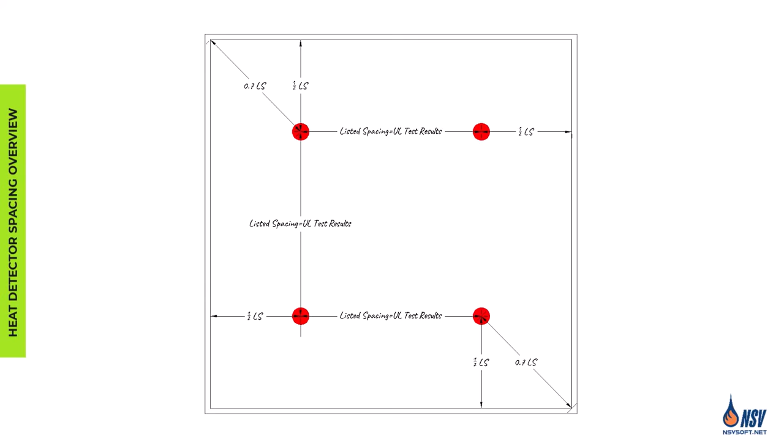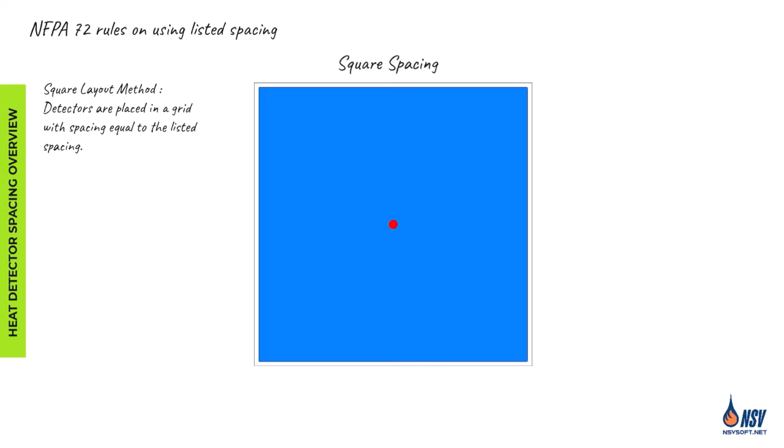There are two methods for applying listed spacing: the square layout and the circular layout. In square layout method, detectors are placed in a square grid pattern. The distance between detectors is equal to the listed spacing. Each detector covers a square area. For example, with 50 feet spacing, 50 feet times 50 feet equals 2,500 square feet.

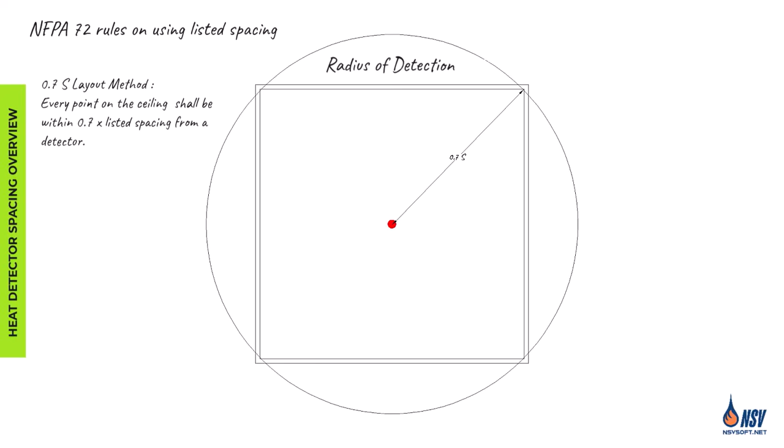In the circular method, every point on the ceiling shall be within 0.7 times listed spacing from a detector. For example, a 50 feet listed spacing detector radius is 0.7 times 50 equals 35 feet.

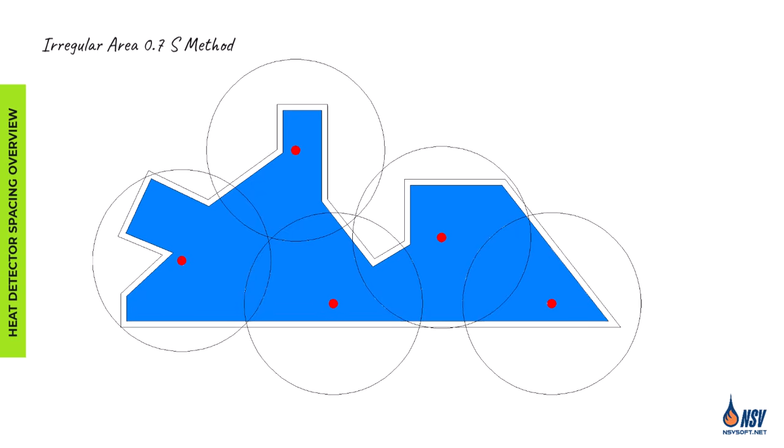Depending on the architecture, square layout suits grid-like spaces and may require more detectors, while circular layout is ideal for irregular areas and corridors, often maximizing coverage with fewer devices. As you can see in this irregular space example, the circular area method reduces the number of detectors. With the circular method, only 5 detectors are needed, while the square method requires 7 detectors to properly cover the area. Heat detectors are typically spaced according to standards established through full-scale fire tests conducted by underwriters' laboratories.

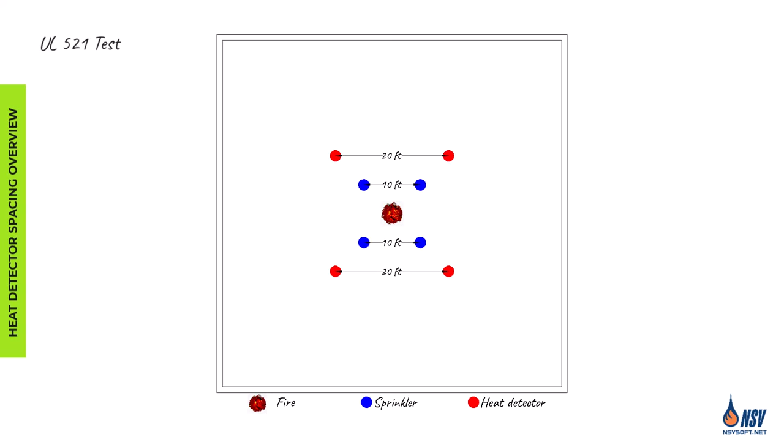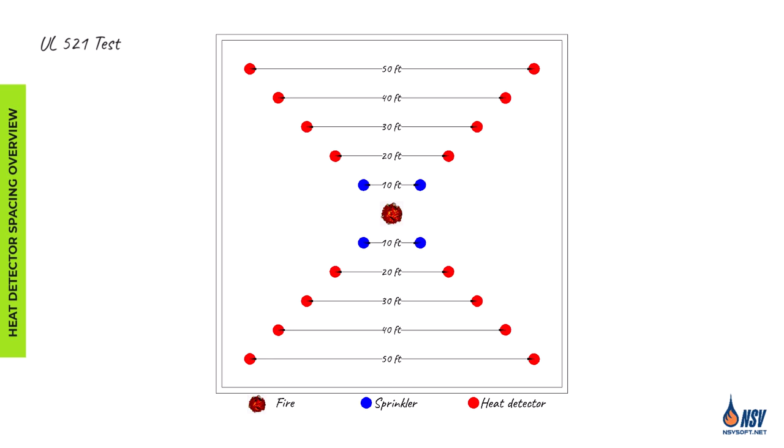These tests determine the listed spacing, the maximum allowable distance between detectors under ideal conditions. The UL test installs standard automatic sprinkler heads 10 feet by 10 feet spacing around the alcohol pan. The heat detectors are placed around the automatic sprinkler head's fuses, and becomes the listed spacing of the heat detector.

Real-world environments often present challenges that affect heat detection performance. High ceilings, structural elements like beams and joists can interfere with heat movement and delay detector activation. To address these variables, NFPA 72 requires that actual installed spacing be less than the listed spacing when such conditions are present.

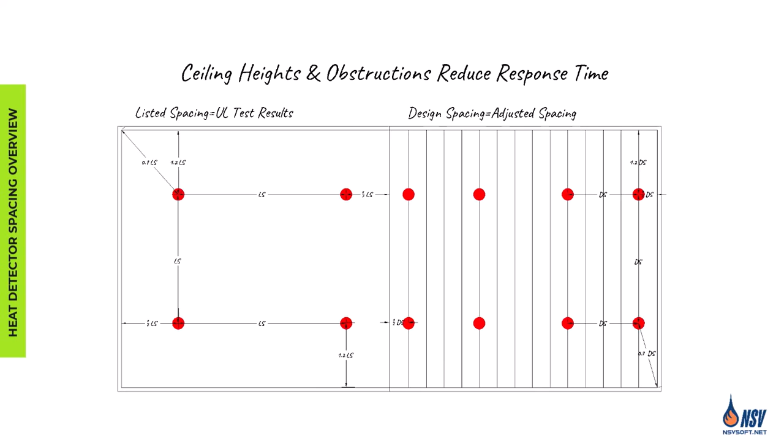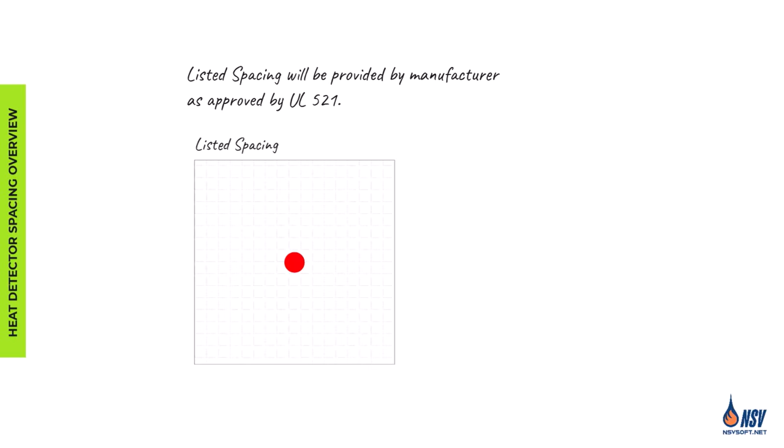Listed spacing is established by the manufacturer and reflects the detector's ability to reliably respond to thermal conditions across a defined coverage area. UL 521 evaluates the detector's sensitivity, response time, and operational reliability under controlled fire scenarios.

The adjusted spacing is referred to as the design spacing, or DS. If no environmental adjustments are necessary, design spacing equals listed spacing. But when conditions vary, NFPA 72 provides specific formulas and reference tables to calculate the appropriate reduced spacing.

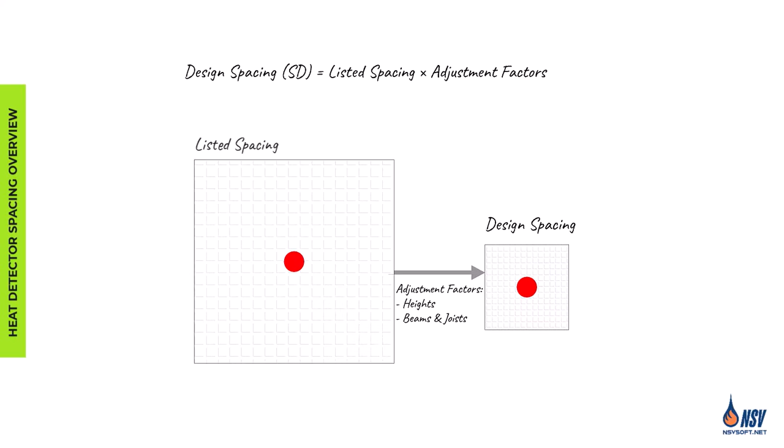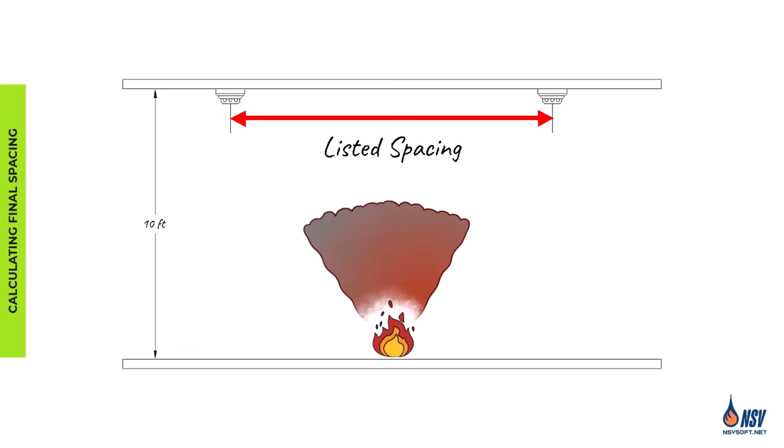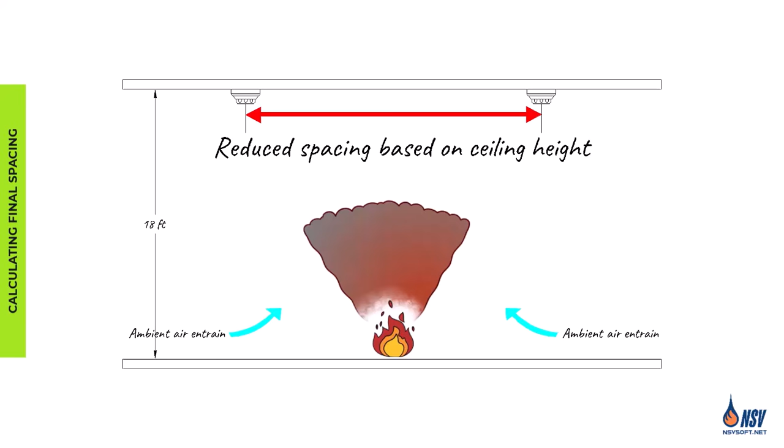When designing heat detector layout in accordance with NFPA 72, determining the correct spacing is critical to ensure code compliance. This process involves 3 steps. It starts with the listed spacing. Step 2 is to apply the ceiling height reduction factor. As ceiling height increases, more ambient air is entrained into the plume, making it cooler. The higher the ceiling, the smaller the allowable distance between detectors.

Step 3 is to apply surface adjustment factor. Architectural features like beams and joists can obstruct heat flow. After applying both the ceiling height and surface adjustment factors, we arrive at the final value known as design spacing, SD. Design spacing is always less than or equal to the listed spacing, ensuring that the system is working properly under real-world conditions.

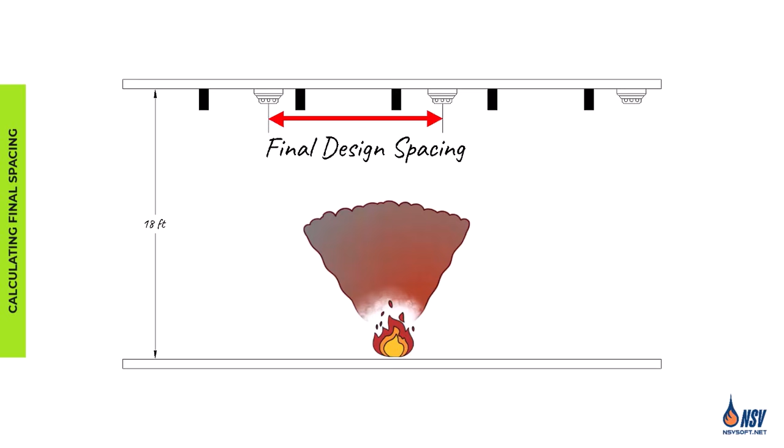When designing heat detection systems, ceiling height plays a critical role in determining detector spacing. As a fire plume rises, it entrains surrounding ambient air. This process cools the gases and dilutes the concentration of fire products, making it harder for heat detectors to respond quickly.

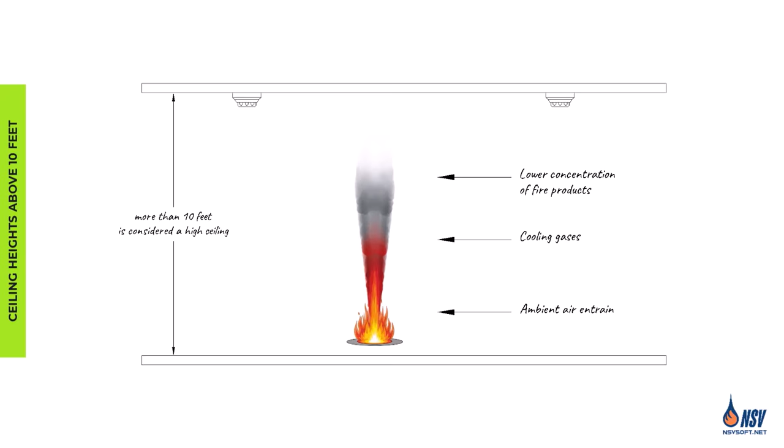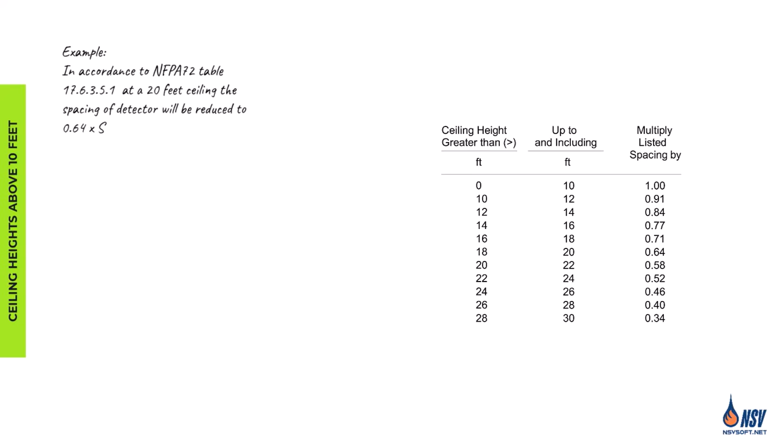To calculate this adjustment, we refer to Table 17.6.3.5.1 in NFPA 72. This table provides reduction factors that must be applied to the manufacturer's listed spacing. For example, let's say a heat detector has a listed spacing of 50 feet. At a ceiling height of 20 feet, Table 17.6.3.5.1 specifies a reduction factor of 0.64, so the adjusted spacing becomes SD equals 0.64 times 50, which is 32 feet.

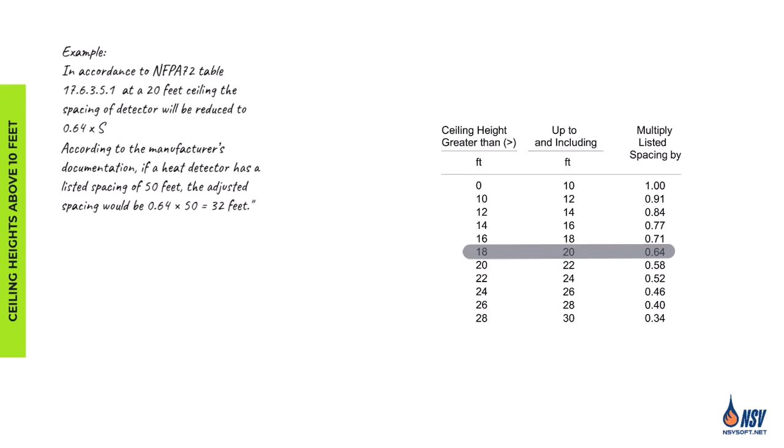In addition to spacing reductions for high ceilings and complex surfaces, code also defines a lower boundary for how closely heat detectors should be placed. The minimum spacing of heat detectors shall not be required to be less than 0.4 times the height of the ceiling.

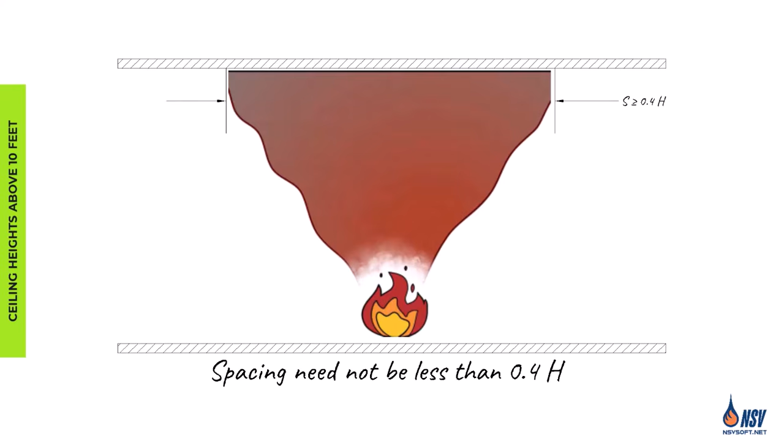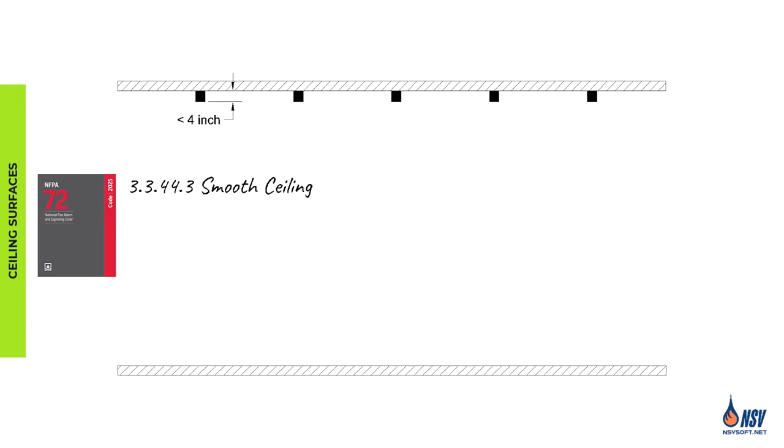The type of ceiling construction plays a critical role in how combustion products move and how effectively heat detectors respond. NFPA 72 classifies ceilings into three main categories: smooth ceiling, beam construction, and solid joist construction.

Joists slow down the ceiling jet, the horizontal movement of hot gases, especially in the direction perpendicular to the joists. To compensate for this, the code mandates a reduction in spacing. The listed spacing perpendicular to the joists must be reduced by 50%. This ensures detectors are close enough to respond effectively despite the slowed heat movement.

No spacing reduction parallel to the joists is required, since heat can flow more freely along the joist channels. As per NFPA 72, Section 17.6.3.2.2, under joisted ceilings, heat detectors should be mounted at the bottom of the joists.

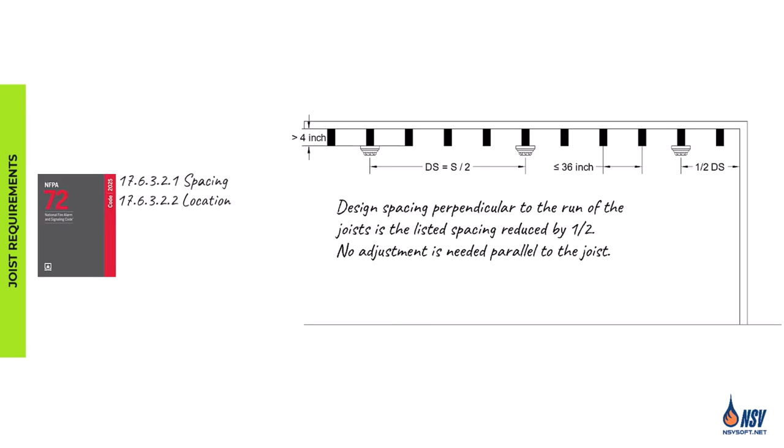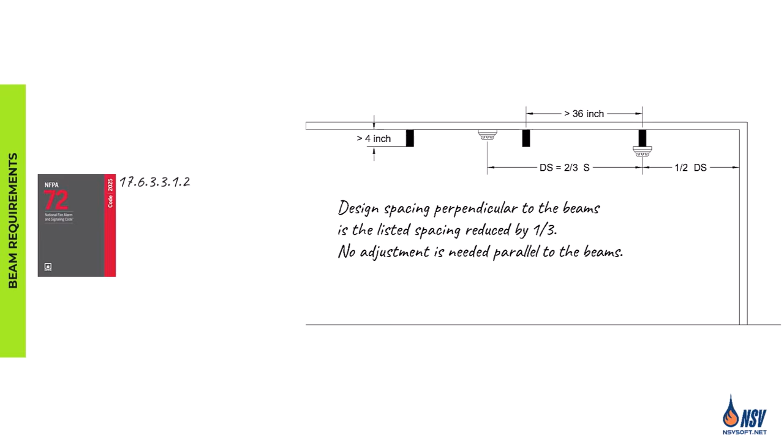When beams project over 4 inches and are spaced more than 3 feet apart, they block the ceiling jet. Code requires detector spacing perpendicular to the beams be reduced to 2/3 of the listed spacing, while spacing parallel to beams remains unchanged. When ceiling beams are very deep and spaced far apart, heat movement is significantly obstructed.

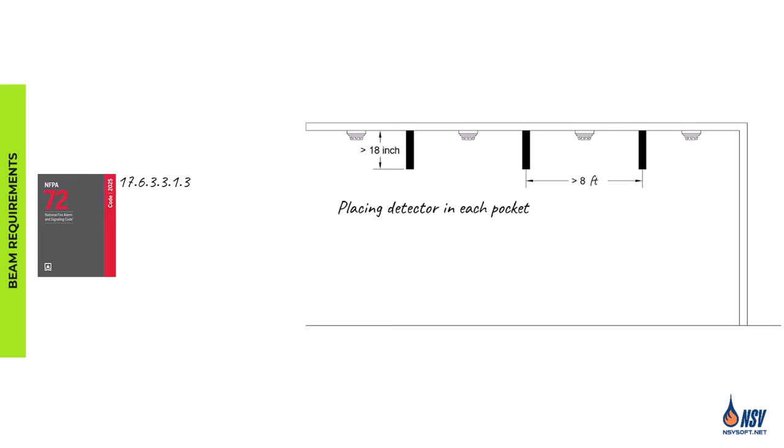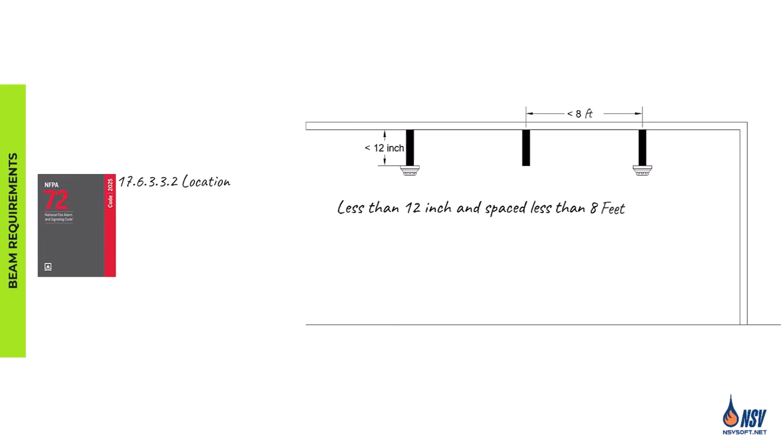According to NFPA 72 Section 17.6.3.3.1.3, if beams are greater than 18 inches and spaced more than 8 feet apart, each beam pocket shall have its own detector. This ensures no pocketed area is left unprotected, as heat may collect within each bay without spreading quickly to adjacent areas. Per NFPA 72 17.6.3.3.2, heat detectors can be mounted on the beam bottoms when beams are under 12 inches deep and spaced less than 8 feet apart center to center.

The heat detector app in the NSVcad fire alarm module helps users design code-compliant detector layouts by calculating design spacing. It automatically adjusts for ceiling height and structural obstructions like beams and joists to ensure accurate placement.

To begin, users should define the building structure and walls using the Define Structure app. In this demonstration, we will define the joists, assuming the other walls and construction elements are already specified. To run the app, click the icon or type NHD. The app interface will then appear, prompting you to select the unit of measurement for your layout, the applicable NFPA 72 edition, the system type, and the detector orientation.

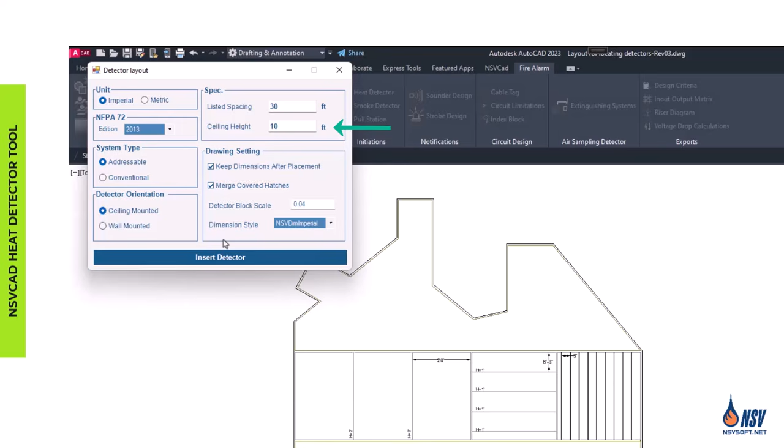Next, input the listed spacing of the detector and ceiling height. Once you've entered all the necessary data, click the Insert Detector button to place the detector on your drawing.

When the detector is positioned in an area with joist construction, the software automatically adjusts the spacing by 50% perpendicular to the joists. Additionally, the app ensures that the detector is placed directly beneath the joist to meet the requirements of Section 17.632 of the NFPA 72 code.

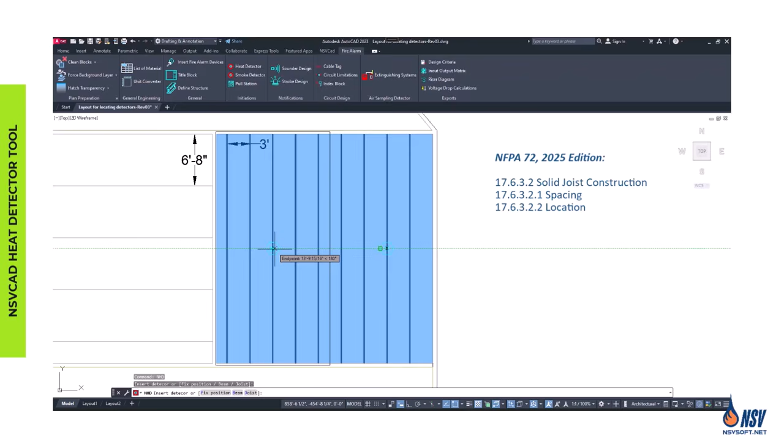In areas with beams, the software automatically reduces the spacing of spot-type heat detectors to 2/3 of the listed spacing perpendicular to the beam direction.

For beams exceeding 18 inches in height and spaced over 8 feet apart, the app limits the detector's coverage area to each bay.

In corridors with smooth ceilings and regular geometry, the software automatically adjusts the detector's coverage area to an optimal detection radius. Users can modify the coverage shape by pressing S for square or C for circle on their keyboard.

Pressing the Control key opens a pop-up window that displays relevant information, including the required number of detectors based on either the circular or square layout shown in the drawing.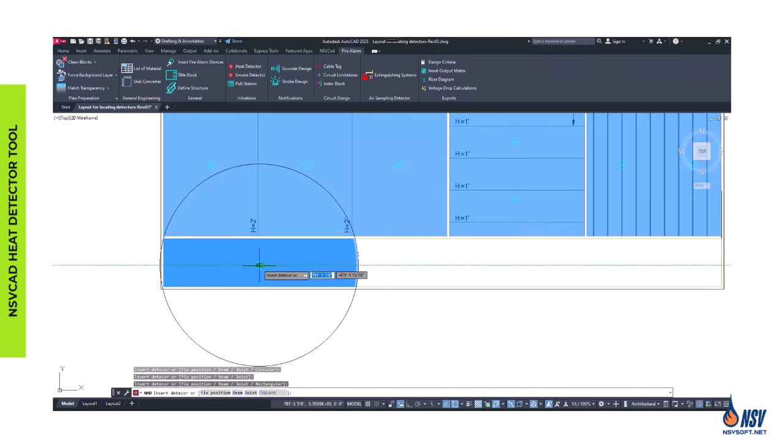The software intelligently analyzes room geometry and layout to optimize detectors fully aligned with the requirements of NFPA 72 and project specifications, ensuring reliable coverage, avoiding overlap, and reducing installation costs.